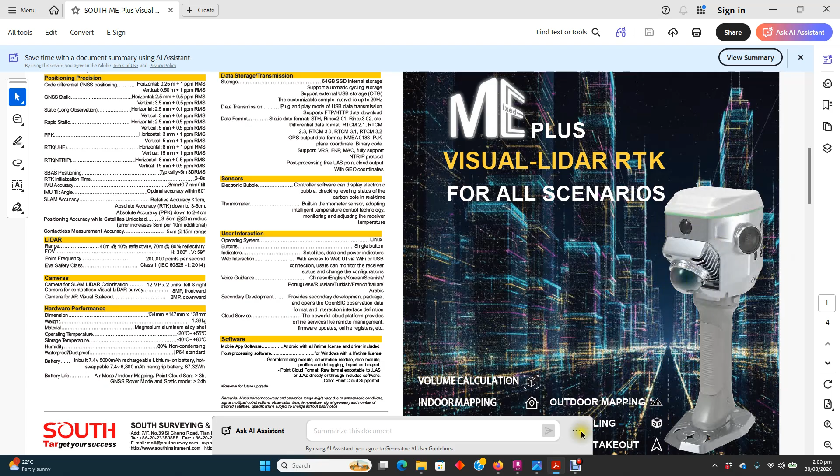And then of course it can be pole mounted. So you don't have to hand hold it like that. You could stick it on a survey pole and operate it as a traditional GNSS, or even more powerful, use the mixed solution where you can use the combined lidar and the GNSS to survey areas that are not very good for GNSS surveys, like under trees or under the eaves of buildings and stuff like that.

One of the powerful features of the new ME Plus is it's got a built-in UHF radio, so you can use it with your own RTK GNSS base station on your site. So that lets you work in more remote locations than previous models.

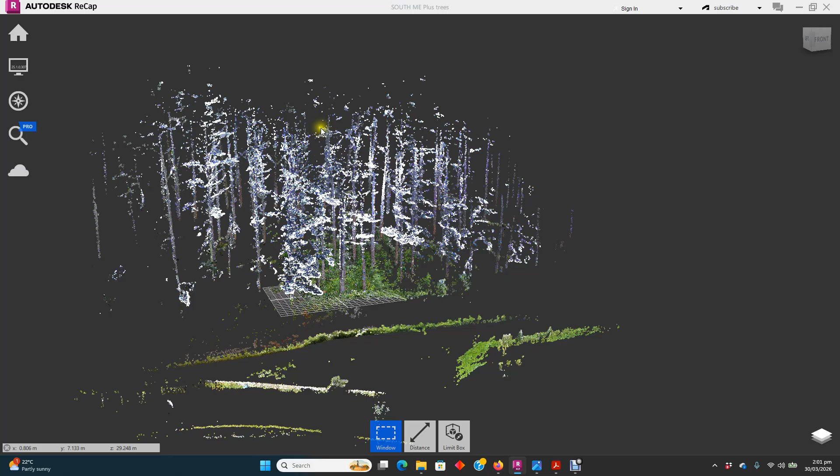So we'll just have a look at the data that we're getting out of it. I'm just showing you some sample point clouds in the Autodesk ReCap software. This is a free plugin by Autodesk. So if you're using Civil 3D, Inventor, Revit, those types of Autodesk products, you can bring in these 3D point clouds and they'll look and perform just like I'm showing you in the video.

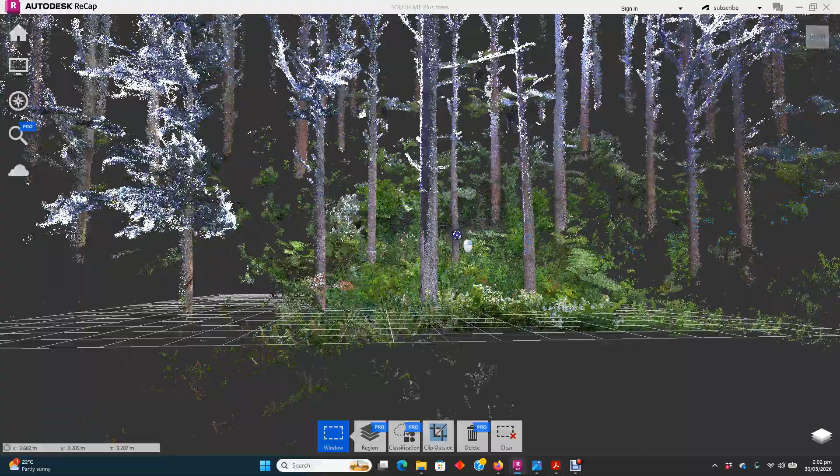So here we've got a small data set just collected in a few minutes of some trees. You can see we've just walked around where my cursor's being moved, but it captures trees way beyond where we're standing and walking. So you can see the level of detail that you can get off the data. So if you just cut out some of the stuff, you can just cut a small slice through here.

So you can see here's one of the stems here. Maybe we just change our view more perpendicular, up and down. So you can see there's another stem here. The stems are, as all tree trunks are, not perfectly circular. So you can go and measure not just the heights, but the diameters.

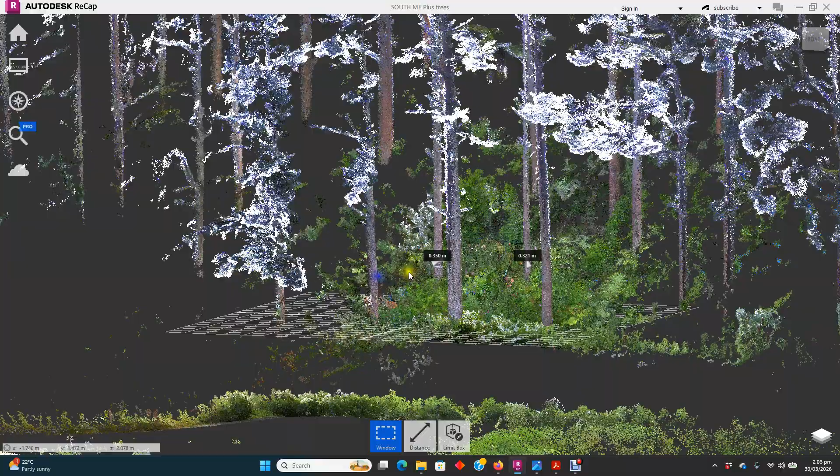So the collection time was a few minutes, the time it took to do a little circular path over the work area. This particular stem here, we've got a little paint mark indicating breast height there, diameter breast height. So that's of some tree species there. If we just go and open up another data set.

So we've got a section of road here that was scanned from here up to the top there. To give you an idea of scale and size: 438 meters, so it's a sizable area. This data set was collected in a single scan that took about 20 minutes at a very slow walking pace.

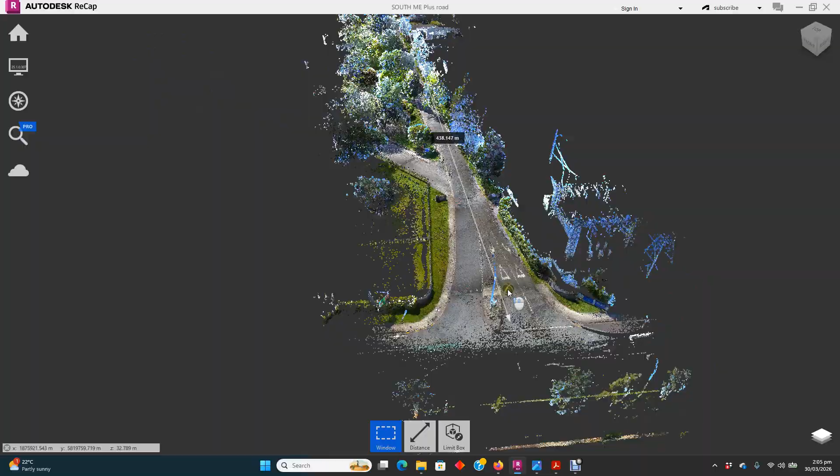And you can see the level of detail that you can really get down to. This is in Tauranga at the race course there where the entranceway is. So we just walked on a zigzag path down through the trees and the road there in the 20 minutes that we had.

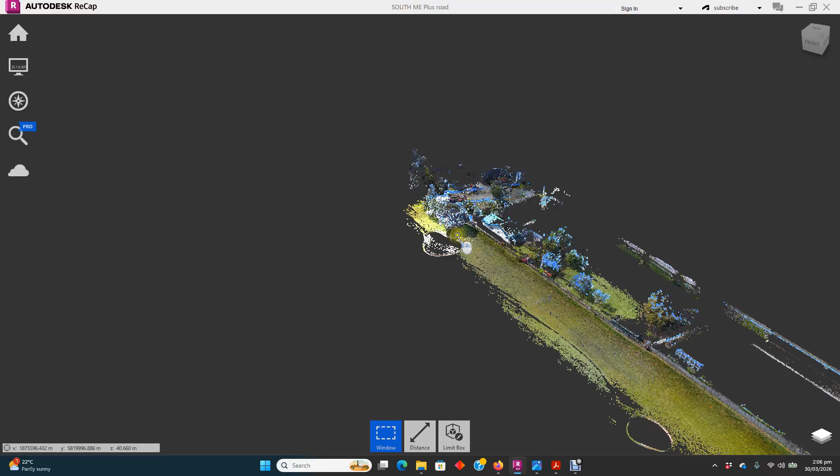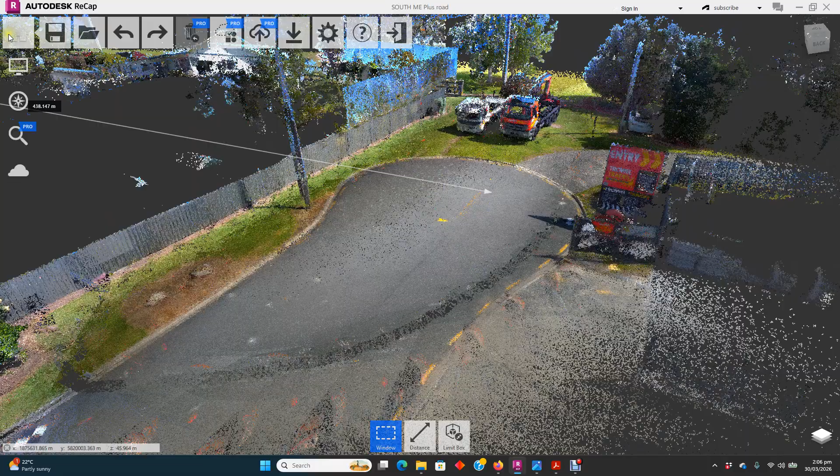So it would be pretty difficult to measure this work area with the GNSS on its own or with a robotic total station because it's a pretty sizable area. So that's the level of detail and the size of an area that you can cover in just 20 minutes. You can cover a lot of area in a very short amount of time. So we'll just move on to another quick data set.

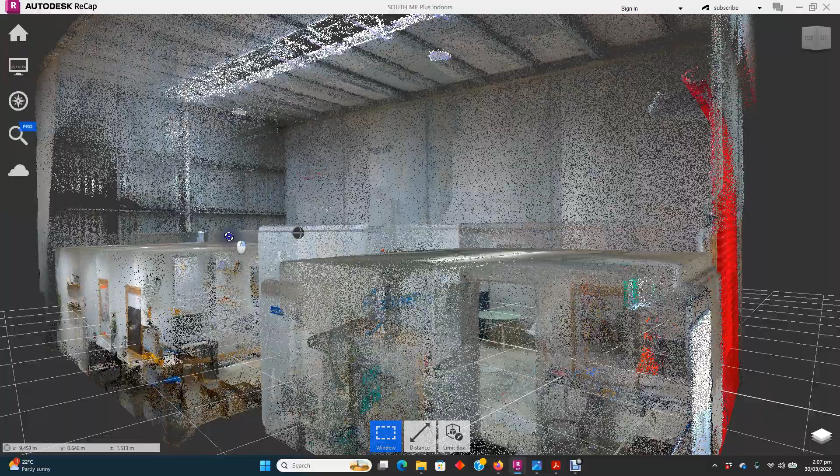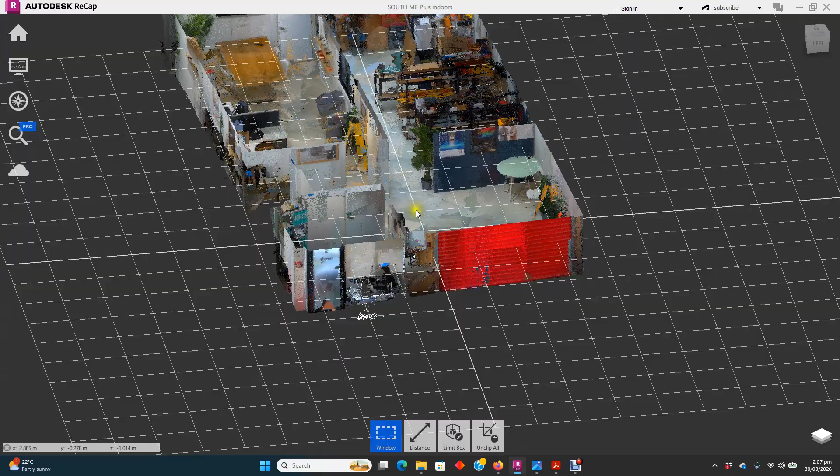So we've just got a tiny data set here measured inside a building. We can do the same thing. We can start to clip out work areas and have a look at stuff. So again, it's just the length of time it takes you to walk through the work area.

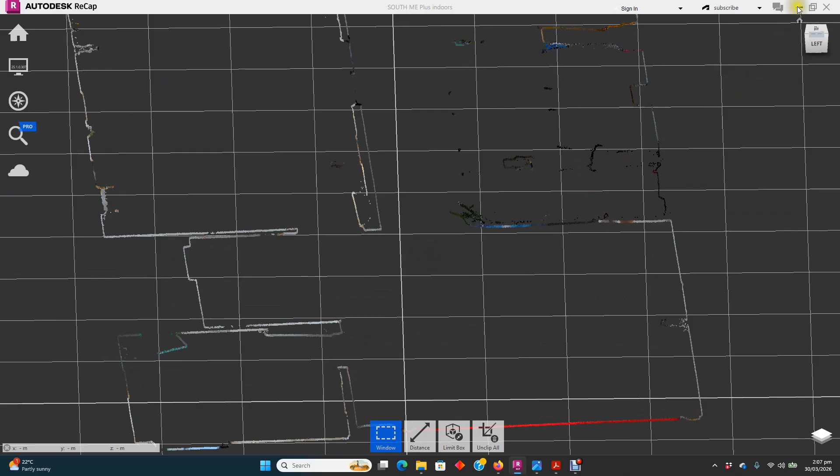And we can, again, take a little slice. So I've just done a little slice here. You can see the thickness on the walls here. Try and render it a bit. So we can go and check some of the wall thicknesses.

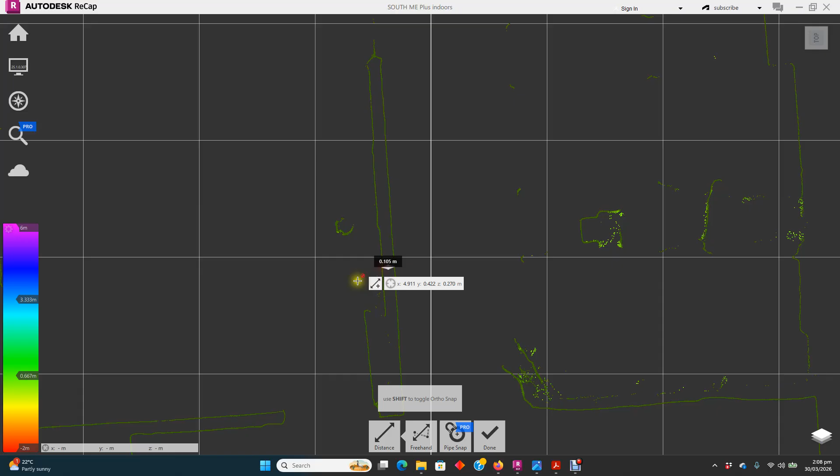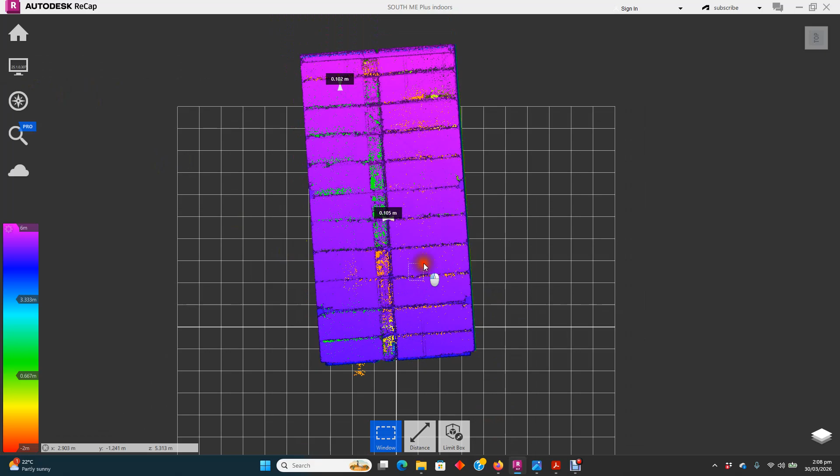So you can see 102 mils there, 105 mils there. It's just a typical wall thickness. So of course, you can take this data into all the Autodesk products and other third-party CAD packages and do your traditional CAD designing and modeling and so on.

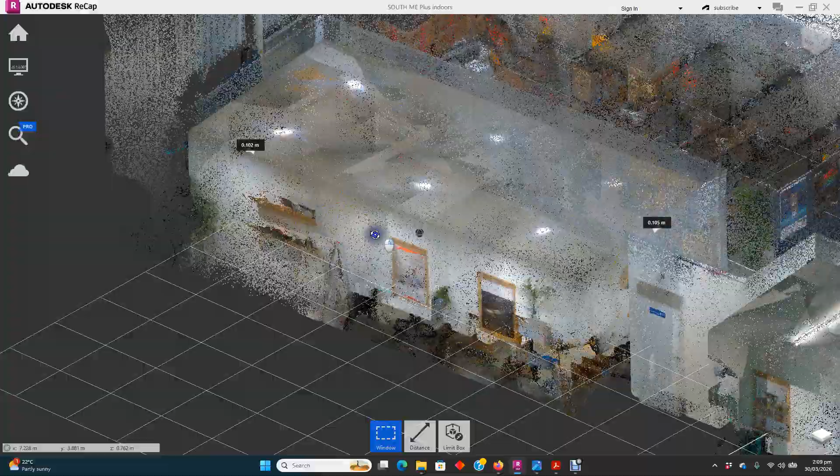So anyway, that's just a very brief overview from me.